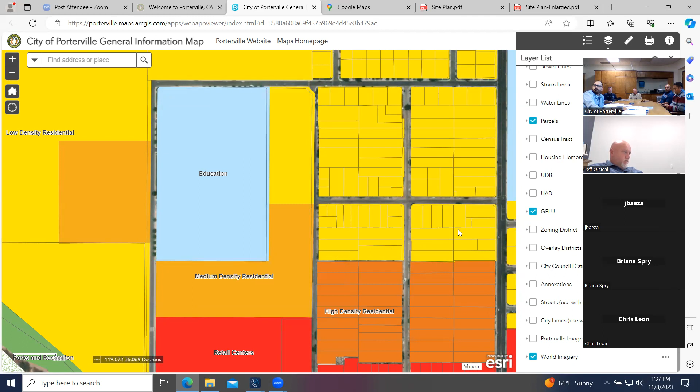As far as the proposed use of a bus maintenance facility, the general plan land use would not allow this type of development on the proposed area. Our general plan does have the designation of medium density residential; as far as the proposed use, it would be more in line with an industrial zone. For the proposed project, that's pretty much going to be our preliminary comments from planning - the proposed use is not in line with the city's urban development land use or our preliminary zoning.

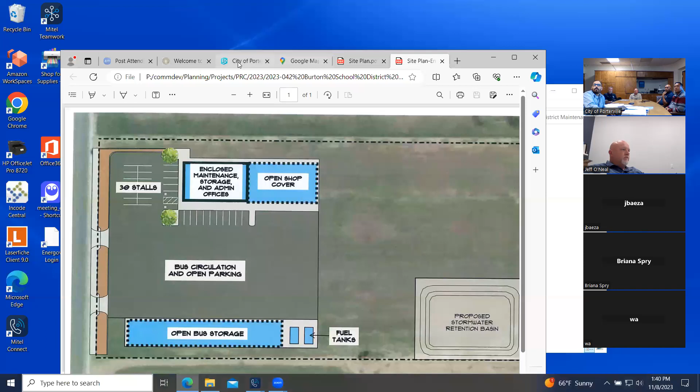Got a quick question - sounds like right now the city limit doesn't include that area, but is the city able to enforce that zoning on it just because it's not actually annexed to the city yet? The property is in our urban development boundary, which requires development to comply with the city's standards. In addition, the project would require most likely city services, and it would require the property to be annexed into the city limits to receive those services. What if we self-contain all the utilities - not a well, but we have water at the high school that we can bring over, and then we could bring a septic tank and do our own ponding basin.

In addition, just to add to the zoning, the Tulare County zoning also has it zoned as AE 20, which is exclusively zoned for agricultural uses.

But then again, the development, because it's in our urban development boundary, would have to comply with the city's development standards. So even if we have our own utilities that we don't need from the city, we still can't use that property for this project.

I think this brings into play a settlement agreement between the city and the county, under which the city is allowed to impose its requirements on projects within the UDB. So in order to extend additional service, this is a question we'd have to run by the county. In order to approve a septic system, the county would have to ask the city if that was acceptable. In order to extend water service from the existing well to the new site, the county would also have to ask the city if that was acceptable.

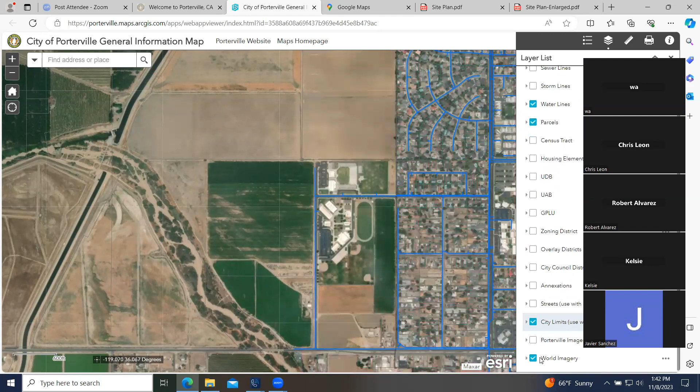Because for non-classroom facilities, local zoning and building requirements are imposed, not DSA requirements. And the statute expressly excludes this type of facility from exemption from local requirements. So a standalone facility like this, even if it's next to an existing school site, is still subject to local rules, not state rules, as far as things like zoning and building are concerned, and that can include utilities.

So currently, because it's zoned residential, obviously this development is not allowed. But is the city open to doing a zone change for that if the applicant goes through the process?

Yeah, we could. I mean, backing up, the city is not at all opposed to this project. It's obviously necessary for the proper efficiency and function of the school district's operations. So yeah, if the district or the landowner were to propose a general plan amendment and change of zone to something that supported the use, then yeah, I think staff could support that.

Okay, now would the zone change be through the city or county, just because it's not officially annexed to the city yet?

So because of the interaction of the city and the county within the city's UDB, that's where it gets odd, because you've got two competing local agencies with their general plan and zoning, and then you have the school district, which kind of stands on its own in a lot of regards. Optimally, the site would be annexed to the city, so then it wouldn't really make a difference.

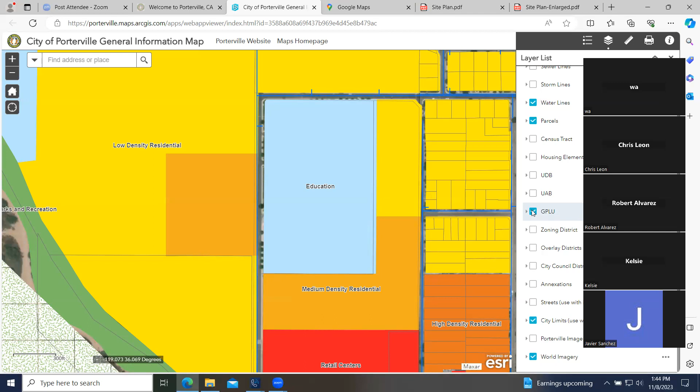And that in and of itself is not a huge issue from the city's perspective. What's the timeline to do the annexing? Realistically, when we're talking about three changes, which would be general plan, zoning, and annexation, the general plan change is probably the thing that would take the longest.

Because just on the front end of that, there's a 90-day waiting period for tribal notification. The annexation would be considered by the city council at the same meeting that the general plan amendment is considered. And then that would be forwarded on to LAFCO, who could probably take action on it within a couple of months. And because you would have 100% landowner consent, there wouldn't even need to be a public hearing at LAFCO or a protest hearing or anything like that. It would just go through without any additional review or analysis.

One question relates to CEQA. Has the school district started or completed a CEQA document for the construction of this project? No, not yet. We're in the process right now, trying to get all this information so that we don't buy it and then wait 6 months, 8 months, a year, and then be told we can't do it.

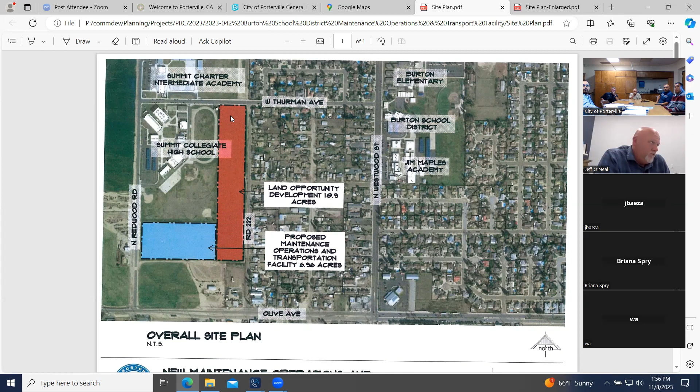And fire, yes. So I think the goal for that red area, that whole block would be owned by the school district, bounded by the blue, the red on the bottom right, and the school on the top left. But I think the red just gives the district more flexibility to master plan out their high school, because right now the track could even get reconfigured. So there might be some ways we can make the athletic fields more efficient now that they have more land.

Perfect. With that, in the letter you'll have the process for the annexation, the zone change, the general plan amendment, and the fees associated. The application - we'll provide that, okay.

I don't know how you were planning on splitting these off, but you are aware that you can just do it via direct conveyance, correct? Just recordation of deeds - the owner doesn't need a parcel map or anything involved. The owner can just convey the land directly to the district via deed, and the district board just has to accept that conveyance. So there's no mapping processes involved.

Our civil engineer, Wah, is online here. I don't know, Wah, if you had any comments regarding that. Jeff is correct - being that it's a public agency, the school doesn't have to do a map per se to split the lot. You could just do it by deed, and it's beneficial to do a metes and bounds legal description so you know where your property's at. When the development occurs, we can get surveyors out there to set corners so it's easier to locate later. Sorry, I didn't realize you were the design professional on the team - thank you for validating.

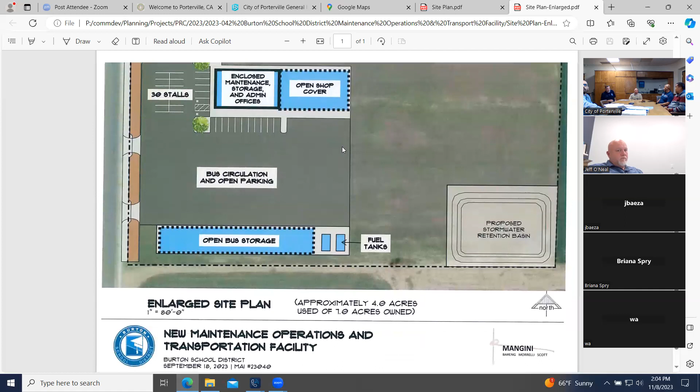All right, so again, only this maintenance or proposed maintenance facility is gonna be acquired at this time? Yes, the first round is just gonna be the blue property. And depending on how the CEQA process goes and the whole application goes, we're looking to purchase the red property also. Okay.

If and when the school district moves forward on the red property, would there be a plan to extend sewer to this maintenance facility? My plan is to get the sewer, and I've got to talk to the property owner currently. But my plan is to bring it across their property and then tap into the city sewer right there. Okay.

Hey Javier, we did the Burton project north of Thurman Avenue there, and the sewer line's real shallow. In fact, there had to be a lift station, I believe, for the Burton's elementary school. So I think if we were to connect to a city line, we might have to come straight from Westwood to the east, or Road 222 there, and head into the blue area.

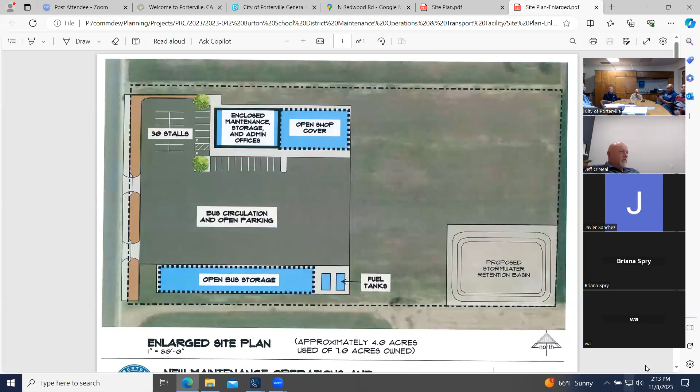Thank you. Next was Robert.

Backflow devices are required on all water services and fire suppression systems. We're gonna need a separate meter and backflow device for all landscaping. This allows the customer to be billed only for wastewater entering the sewer system, and not the entire consumption of water. Those are all my comments.

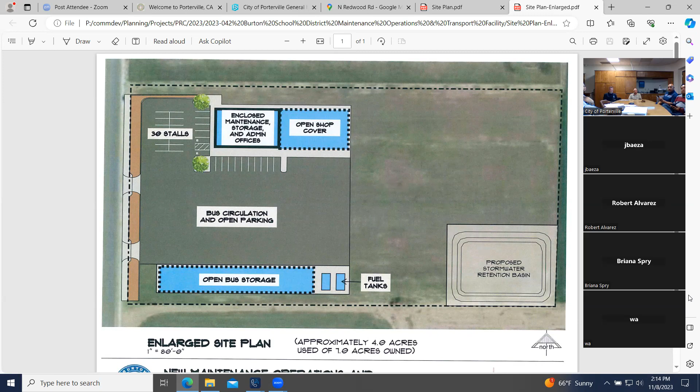Thank you, Robert. Next was Joe. No comments from the street department. Thank you. And that is all from staff.

Is there any additional questions from the applicant? I'll see when we get the letter. The letter normally takes about 2 to 3 weeks after today's meeting, which will outline all the departments' comments, conditions, and process to move forward. Anticipated impact fees?

Javier, would you be able to answer that? If you can provide us the approximate square footage, we can give you a rough idea. You're on there, on the last one? If you go to the next sheet. Going, is there another sheet? You should have - maybe we didn't include the floor plans. I thought we did.

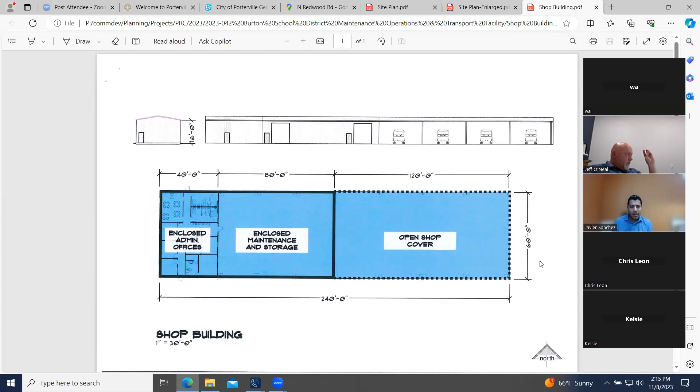Here you go. Okay, so if you could send that over, we can give you a rough idea of those. Yeah, so that way we have it, because like I said, we have a budget, and I gotta kind of figure out how much money it's gonna cost us, and this will be a good cost to put in there so we know what's coming.

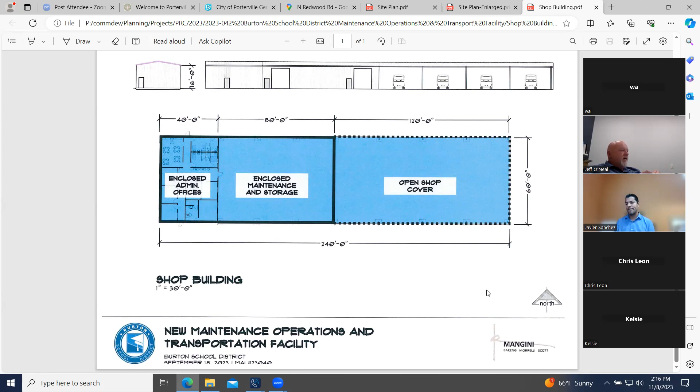So one thing just came up: it looks like the property is also under a Williamson Act contract. I don't know if you guys were aware of that, and that would have to be canceled before the school could be built, which again, there's a process for that. That would actually have to be canceled through Tulare County, but that could also all occur concurrently with anything else. In fact, that can occur entirely separately of anything else.

But yeah, the owner would need to file a notice of non-renewal with Tulare County and have that recorded. And then this might increase cost to the district kind of substantially. Unfortunately this amount just went down, but when you cancel a contract there's a 6%, sorry, a penalty on the fair market value of the land that needs to be paid to the county to cancel that. Don't quote me on the number - it used to be 12.5%, and it just went down in 2023. It might be 6.25% now, I think they cut it in half.

Yeah, thank you for that. I think we were advised just recently regarding that as well. I don't want to take up too much of your time, I know you have another agenda item. Can you just really quickly describe the Williamson Act, the history behind that and what that means to cancel it?

Yeah, so the Williamson Act was put in place back in the 60s to help preserve ag land that was at risk of conversion to urban uses. Essentially, the property owners enter into a contract with the county, under which the property is not appraised or assessed as developable, but as ag land. In addition, they receive greatly reduced property taxes. In return, it can't be used for anything other than agricultural uses or a very narrow band of related uses to agriculture. That contract is for 10 years and self-renews annually, so it's basically always good for 9 to 10 years.

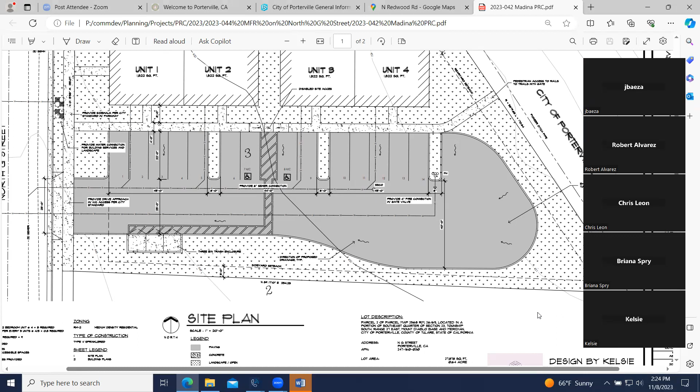And if they do go to or consider adding more units beyond a duplex, they'll kick in the requirement for a fire department connection, and so we'll be looking for that location to be within 50 feet of a functioning fire hydrant. But that's all stuff we can work out in the plan submittal.

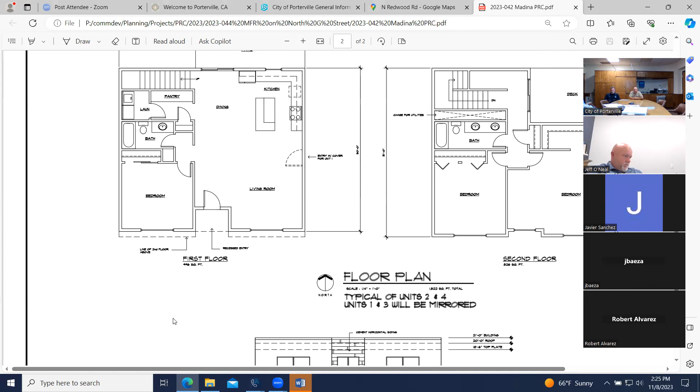Thank you, Taylor. Next, with our building department with James. I mean, no comment at this time. They are duplexes, they're not a triplex, so the path of travel to the trash enclosure would not be required.

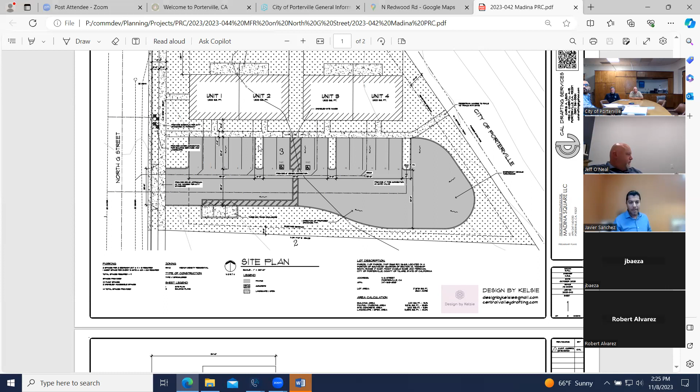As this parcel develops, we'll be looking at frontage improvements, similar to the previous item, with offset sidewalk and a landscape strip. Hopefully those poles remain in good alignment so improvements can be built around them. Street lights will also be needed, and there will be some on-site retainage required for MS4 requirements, which can be achieved through landscape swales, pervious concrete, or similar methods. Water and sewer are already there, so it's just a matter of extending those services.

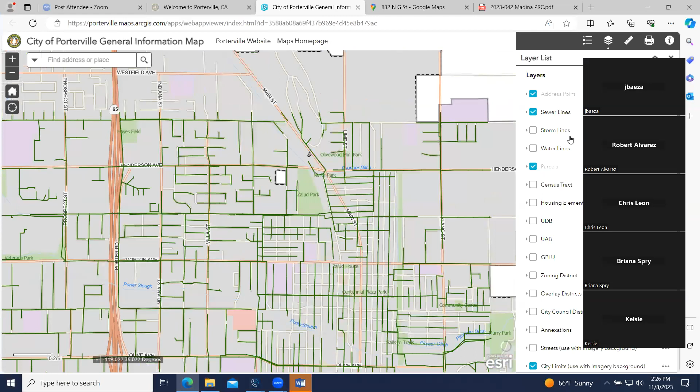You have the 3-bin enclosure for the trash, but I'm wondering if we could move that to another location so it's a more direct stab, and my guys aren't blocking or backing up into the street. Maybe somewhere over on that corner in the bulb.

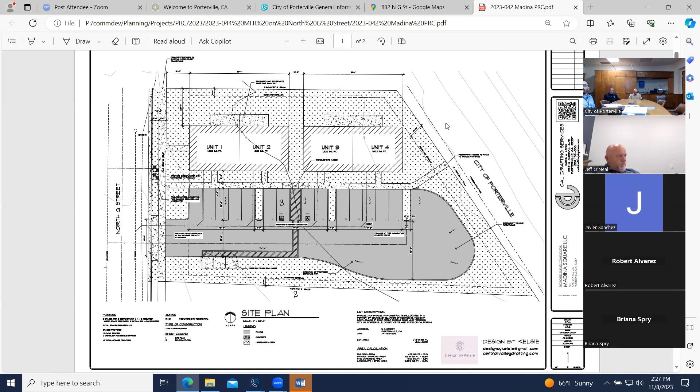Looks like that's all comments from staff. Is there any questions from the applicant? Are you able to hear me?

Yes, hello Kelsie. I have a question regarding the reduction in parking due to the transit facility location. What is that number? What is that factor? How can it be reduced?

The local jurisdictions cannot require multifamily developments to meet our minimum required parking for the development. It's going to be upon the developer if they would like to provide some type of parking for the project. Of course, it could be wise to provide something, but it's going to be upon the developer to make that decision.

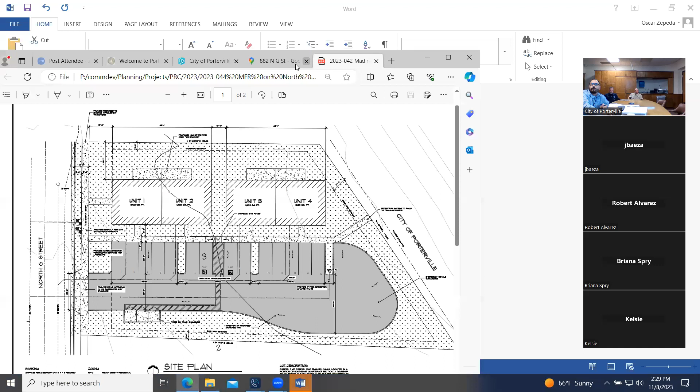Okay, and just for the conversation, the transit facilities are here on Henderson, right? Quite a few, and they're within a half a mile of the project.

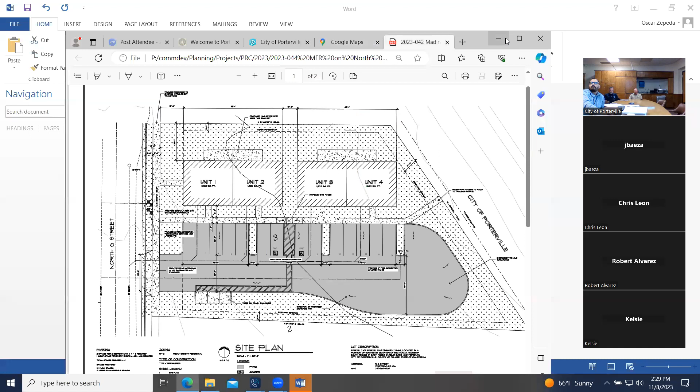Chris? Going back to, if I understood this correctly, the 30% visibility of the parking - is that, explain that to me.

So under section 201.04B1, under parking and garage frontage limitation, the total frontage of parking areas visible from the street, which includes open parking, carports, and garages, shall not exceed 30% of that lot frontage.

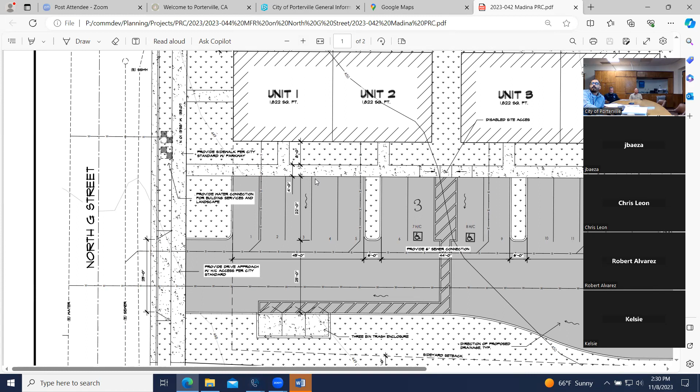So how far back do we have to go? As the way the code is worded, it's whatever is visible from the street. So we have about 49 feet. Divide that by, I think the lot is 133 feet wide, gets you about 35%.

So at what point do we not see parking from the street? If you have a building, you could put a building here. For example, you could rotate this building this way, have a driveway and provide parking in the back, and it's no longer visible - only the driveway would be visible. That could be a solution there to try to achieve that, possibly rotating this building and having the driveway and parking behind it.

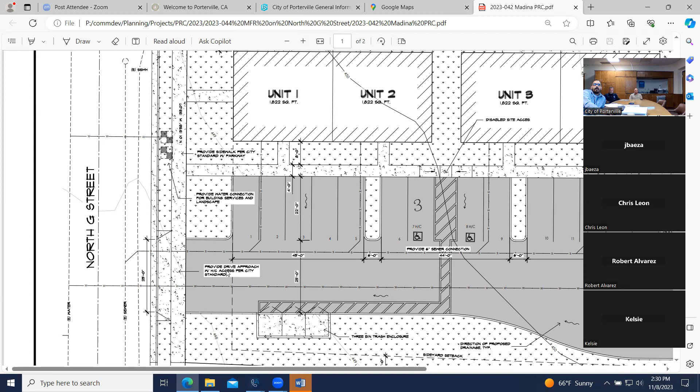Or again, you could probably stack this building next to each other and provide parking in the rear of both buildings, and that could possibly open up the development for more units.

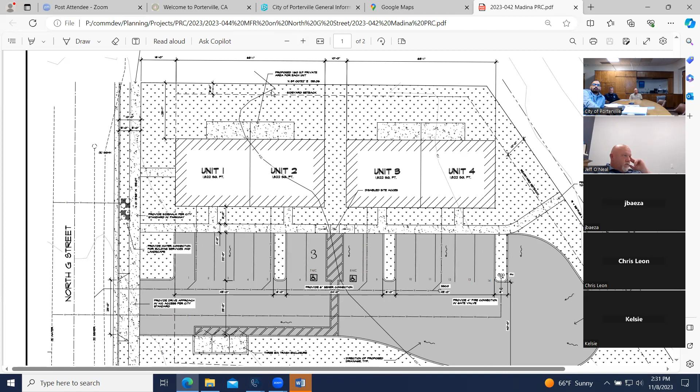Can the parking area not be screened off? Does that not apply here? You could probably screen it with some kind of hedge or something that prevents it from being visible, or fencing. Okay.

And I guess we're still a little unclear about how much parking can be reduced. With the transit location in mind, I still don't understand how much we can reduce. I believe Oscar is saying that if you choose to, you can have no parking because of the proximity of the transit station. Oh, okay, that's a nice way of saying that.

So we would just need site circulation then to comply with fire, with engineering, with whatever else, and we can greatly increase the density of buildings on this property. Correct, not to exceed 15 per net acre. Yeah, within allowable, and then that would eliminate the frontage of the parking situation we have. Correct, possibly. Okay, that clarifies a lot. Thank you.

Any additional questions? Go ahead. 2 to 3 weeks until we get these? Yes. Okay.